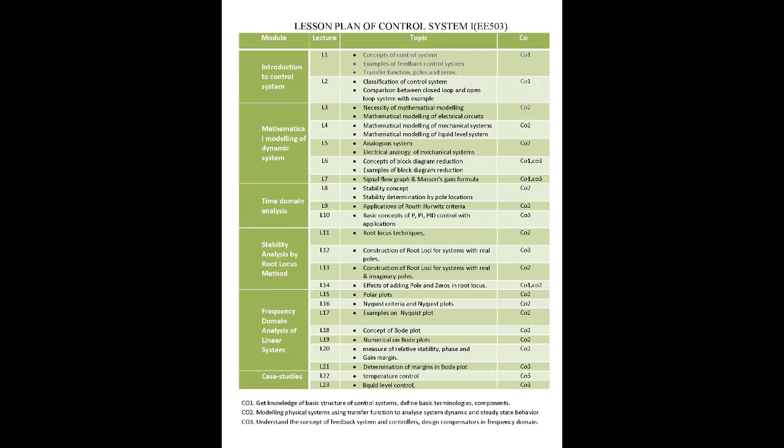In this video, we will discuss the measure of relative stability using the phase margin and the gain margin. This video will contain the relative stability, the phase margin, gain margin and the stability condition using the phase margin and gain margin, and an example.

So let's start with what is the relative stability. Now the relative stability actually defines the stability of a system with respect to certain parameters or conditions. In the root locus technique we have already seen that as the gain is increased, the closed loop system has a tendency to become relatively less stable. And in the transient response of the underdamped system, the overshoot increases with the increase in gain, and the system goes to instability.

So this figure is the polar plot of the open loop transfer function G(s)H(s) = K / s(1 + sT1)(1 + sT2). Now, there is a tendency for the polar plot to encircle the critical point -1 + j0 as the gain value K is increased. From the graph, we can see that K3 is maximum, where K1 is less, and the graph is shown for different values K1, K2 and K3.

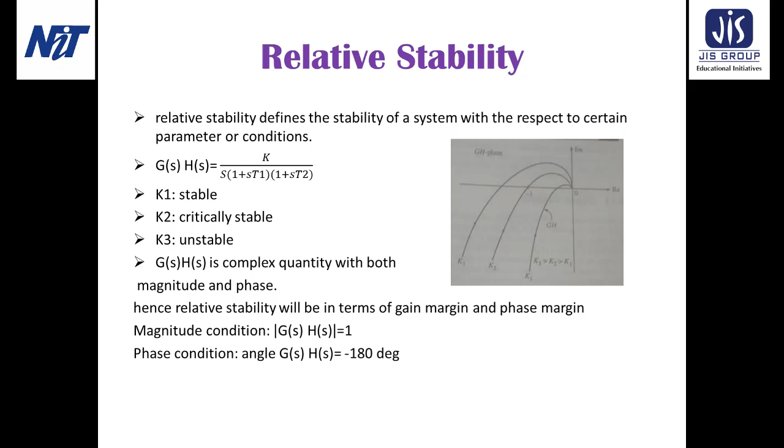So next we will discuss the phase margin. Now if the magnitude of GH is equal to 1, that means unity, if we convert it into dB, then 20 log 1 becomes 0, because log 1 is 0, and then the closed loop system is just critically stable. So for mod of GH equal to 1, the system becomes critically stable. That means the 0 dB line is the critical point for determining the system stability gain wise.

Now, when we consider the equation mod of G(s)H(s) equal to 1 and it is satisfied, then to make the closed loop system just critically stable phase wise, the measure of phase angle from -180 degree is the phase margin. That is, the margin of phase we can play with to make the closed loop system just critically stable. And if the angle of GH is less than -180 degree, then we can say the phase margin is negative, otherwise it is positive.

And for a positive phase margin, the closed loop system is stable, and for a negative phase margin, the closed loop system becomes unstable, keeping the gain at the critical point, mod of GH equal to 1 or 0 dB.

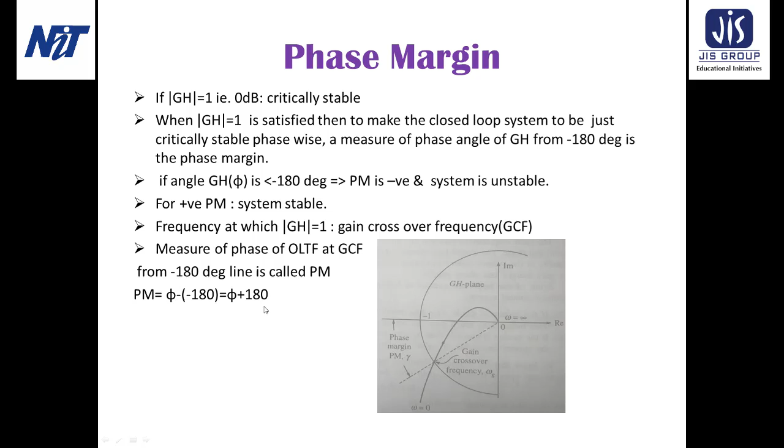So, the measure of phase of the open loop transfer function at GCF from the minus 180 degree line is known as the phase margin, and here phase margin is the angle phi. It is the angle of G(jω)H(jω) minus minus 180 degrees, which gives phi plus 180 degrees. So, it is the formula of the phase margin.

So, next we will discuss the gain margin. From the relation angle of GH equal to minus 180 degrees, when the open loop transfer function GH crosses the negative real axis, that is the minus 180 degree line, then the closed loop system is phase wise critically stable.

Now, the frequency at which the open loop transfer function GH crosses the -180 degree line is called the phase crossover frequency. This one is the locus of G(jω)H(jω). Now it crosses this -180-degree line at this point. So here the frequency is known as the phase crossover frequency and it is denoted by omega p.

Now the measure of the magnitude of mod GH at the phase crossover frequency from the critical point -1 plus j0 gives the gain margin, and that we can play with for design purpose before the system becomes just unstable or critically stable gain wise.

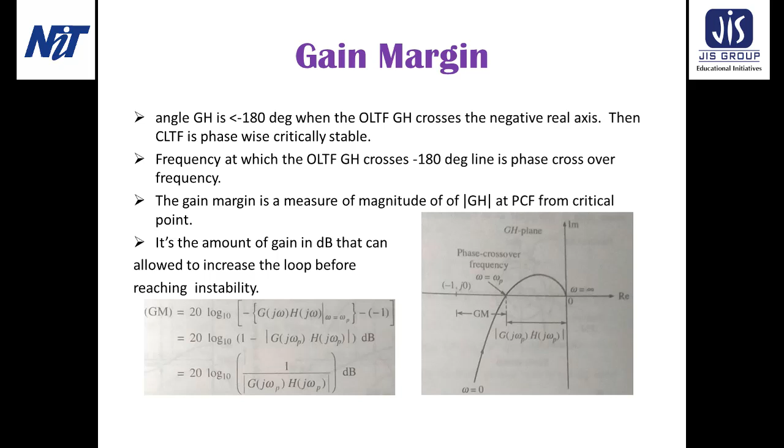Now, if the gain margin is positive, then the closed loop system is stable. And for the first order or second order system, the gain margin is always infinite and hence it is stable for all gain. So these are the stability conditions for the gain margin and phase margin.

So we have discussed before that if the phase margin and gain margin are both positive, then the system becomes stable. So for positive phase margin and gain margin, the system becomes stable, whereas for the negative phase margin, the system is unstable, but for the negative gain margin, generally the system is unstable.

Now, if we consider the first order or the second order system, then the gain margin is always infinite and hence it is stable for all gain, as the polar plot of the first order or second order system does not cross the negative real axis. And when the critical point is enclosed by the GH plot, the magnitude of G(jω)H(jω) is greater than unity and the gain margin in dB becomes negative. So, a negative gain margin in dB does not always correspond to an unstable system.

Now, if we consider the minimum phase system, then if both the gain margin and the phase margin are positive, the closed loop system will be stable. And the closed loop system may be unstable if either the gain margin or the phase margin is negative.

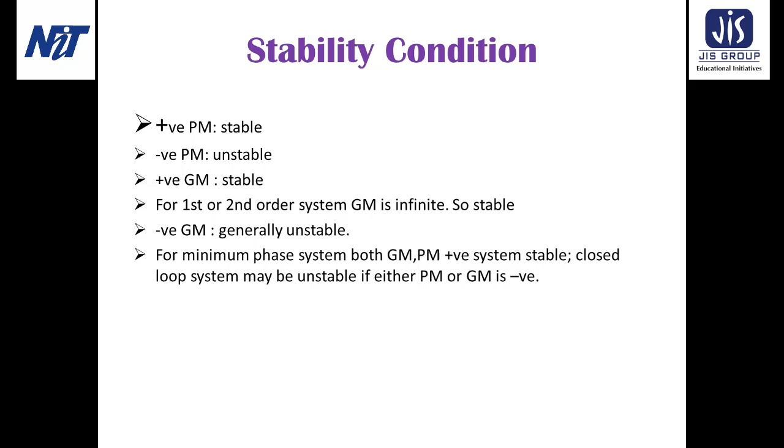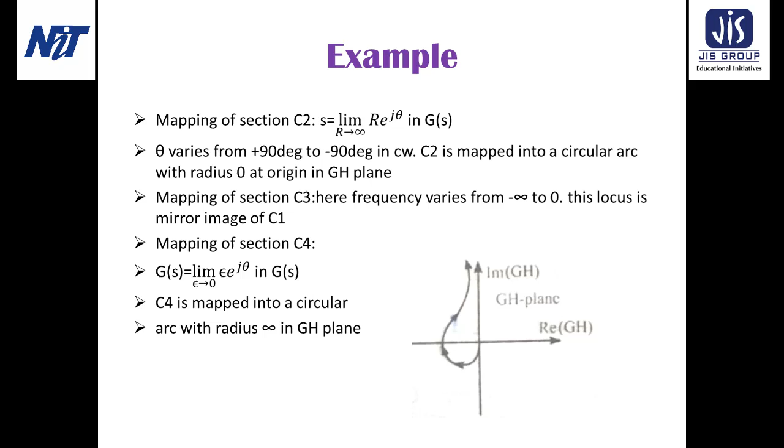And for section C4, we can see that this is a very small radius semicircular arc, and hence I have put ε tending to 0 and εe^(jθ), where θ is varying from -90 to +90, and this is mapped into a circular arc with infinite radius in the GH plane. And as θ is varying from -90 to +90, it is actually covering the whole right hand side. So this is the complete Nyquist plot.

So after getting this Nyquist plot, we have to find out this point of intersection with the negative real axis. This we will find out by using the rationalization of G(jω). So this is G(jω), and by rationalizing we can divide it into two parts: one is the real part and another is the imaginary part.

Now on the real axis, all the imaginary values are equal to 0. So we can set this imaginary part equal to 0. Then we can find out the value of omega, which becomes root over 54. So at this point, omega is root over 54. And if we put this value of omega in mod of G(jω), then we can find out the value of magnitude at this point, which is actually 0.617.

As it is a magnitude, that's why it has a plus sign, but actually it is located on the left hand side, and this is -0.61. So this 0.61 is the point of intersection with the real axis.

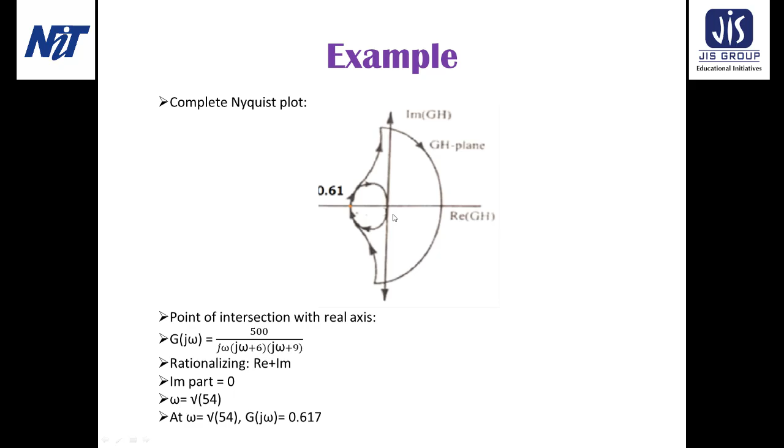So now we have to find out the phase margin and the gain margin. So here this is the real axis and this is the imaginary axis, and I have considered a unit radius circle. This unit radius circle will cut the locus at this point, and as it is a unit radius circle, this blue line is the radius of this circle, and this is 1, which means at this point mod of GH is equal to 1. So we are going to put mod of GH equal to 1.

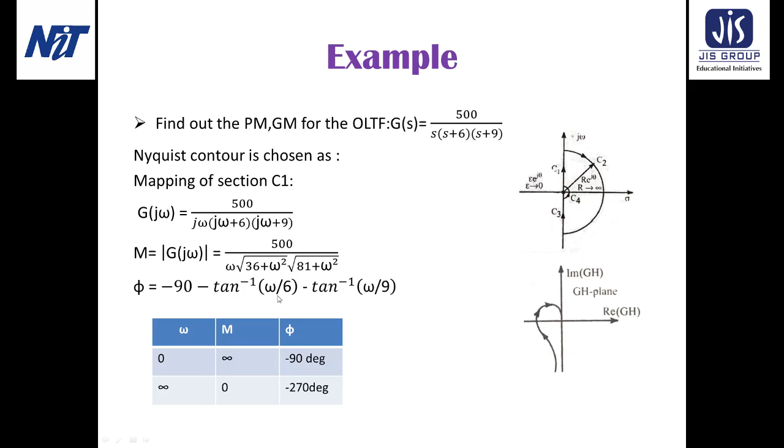If mod of GH is equal to 1, then we can solve this equation, and the solution becomes omega equal to 5.68. Then we will put the omega value in the phase angle. We have already found out the angle relation, that is -90 minus tan inverse omega by 6 minus tan inverse omega by 9. When we put the value of omega here, we find the angle is -165 degrees. So this phi is actually this larger angle, -165 degrees.

Now we have to find out the phase margin of the system. So how to find out the phase margin? Phase margin is this gap, the difference from this point to this point. This angle is phi. So the difference is phi minus -180 degrees, which gives phi plus 180 degrees, and this gives us a phase margin equal to 15 degrees. So the phase margin is 15 degrees.

Next we have to find out the gain margin of the given system. To find out the gain margin, first we need the point of intersection here. This point is actually the point of intersection with the real axis, which we found in the previous slide, that is 0.617. So I have considered here 0.6. So this point is 0.6, meaning the magnitude is 0.6. So the gain margin is the difference from the -1 point to this point.